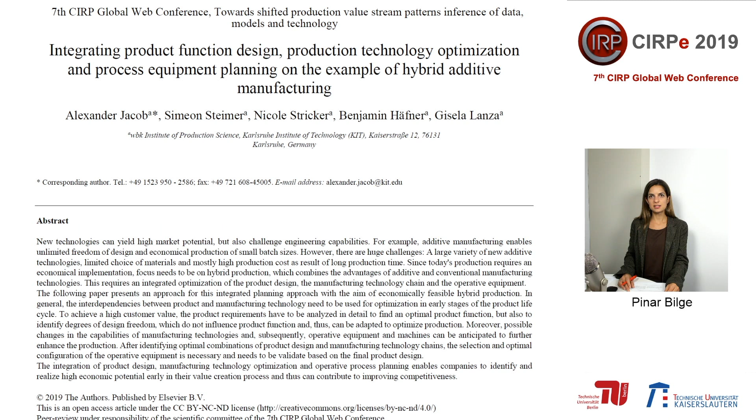Welcome to my presentation within the CIRPe2019 conference. Today I will talk about integrating product function design, production technology optimization, and process equipment planning on the example of hybrid additive manufacturing. To understand the necessity of such an integration, it is important to be aware of the shortening product life cycles and the increasing innovative pressure on companies.

Therefore, companies are required to shorten and accelerate their product development and production planning processes. Within each of the three domains—product function design, technology planning, and machine and equipment selection—I will briefly present the state of the art.

For product function design, it is important to know that nowadays a product design is usually iteratively validated. For example, a computer-aided design is created and then a finite element method or a computational fluid dynamic method is used to validate its functional fulfillment. Based on this degree of fulfillment, usually another adaptation of the product design is manually conducted. Automating this flow between product design and product function validation is only rarely seen. For example, topology optimization nowadays is automated and thereby optimizes product function, for example, lightweight design, automatically.

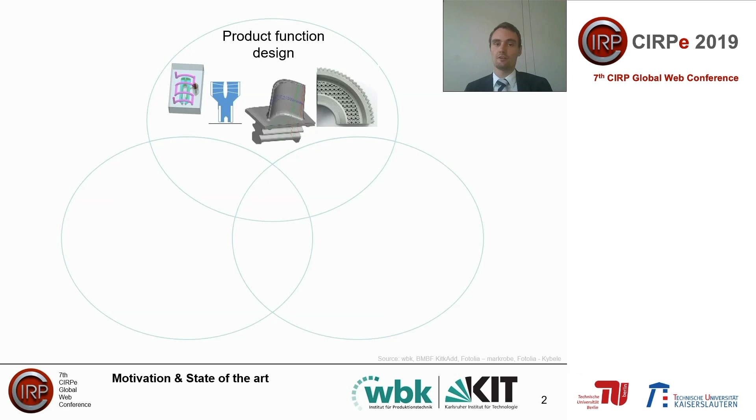In technology planning, the goal is allocating a manufacturing technology for producing a certain product or a certain product feature. To allocate the manufacturing technology to a product feature, usually certain product requirements are taken into account and are modeled. Recent approaches in technology planning focus on stochastic modeling of uncertainty about technological capacities or abilities of manufacturing technologies, or focus on special areas such as producing critical parts in airplanes, for example.

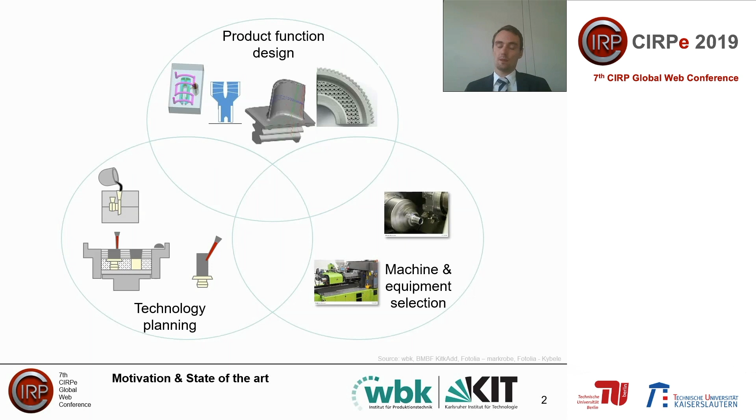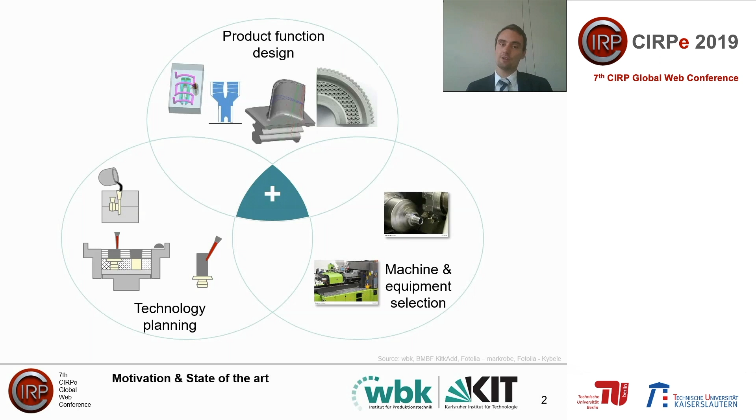The integration of technology planning is usually seen within machine and equipment selection, so that based on technology planning decisions, there are approaches which are able to select a certain machine based on product requirements and manufacturing technology requirements. Nonetheless, there are no approaches able to automatically integrate product function design, technology planning, and machine and equipment selection. Therefore, I will showcase an approach able to orchestrate this integration and also to digitize its application.

The presented approach is shown here. First, we will discuss how a product model can be designed, how the manufacturing technology model needs to be designed, and how such a product model can be used to calculate and optimize a certain product function. Based on this information about the product function, adaptations of the product model on the left side or the manufacturing technology model are possible and can be revalidated again based on the product function optimization.

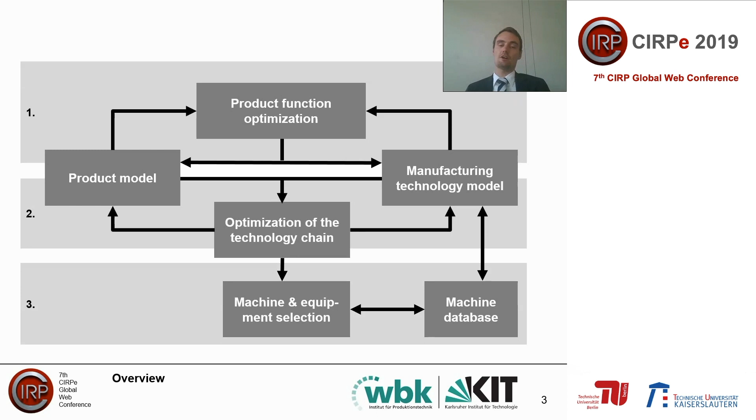Secondly, from a production standpoint, the optimization of the technology chain can be discussed. Therefore, the before-mentioned product model is necessary to allocate a certain manufacturing technology, in form of its model, to produce this product or this product subset in form of a feature. Last, the machine and equipment selection is also integrated, based on the final product design and the final optimal technology chain.

Regarding the technology model, as presented in earlier work, an object-oriented design approach is highly useful. For example, a technology can be modeled focusing on topics such as the producible materials, the possible dimensions of its build volume, and also the possible tolerances which can be accomplished. Such parameters are usually deduced from a set of machines which represent a certain technology.

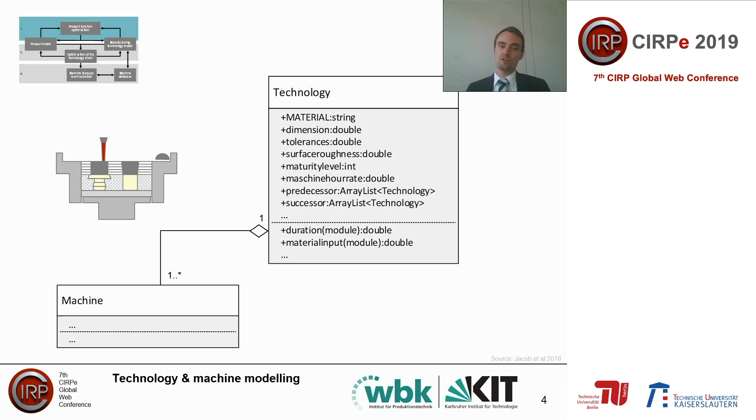On the other hand, the product model can also be modeled based on an object-oriented approach. The same parameters, for example, the product dimension and the product material, are modeled here again and can be, as we will see, used to compare them to machines and also manufacturing technologies.

Regarding the product function optimization, as mentioned earlier, it is necessary to implement it here. In this approach, this is conducted by designing a certain method which has certain product input parameters, for example, the CAD geometry of a product, and then returns a fulfillment value.

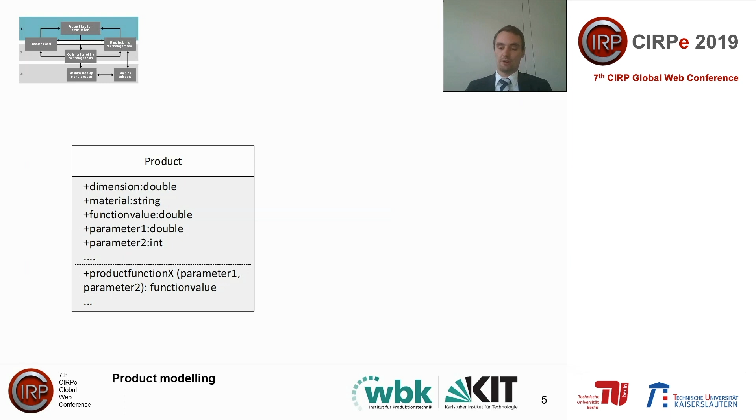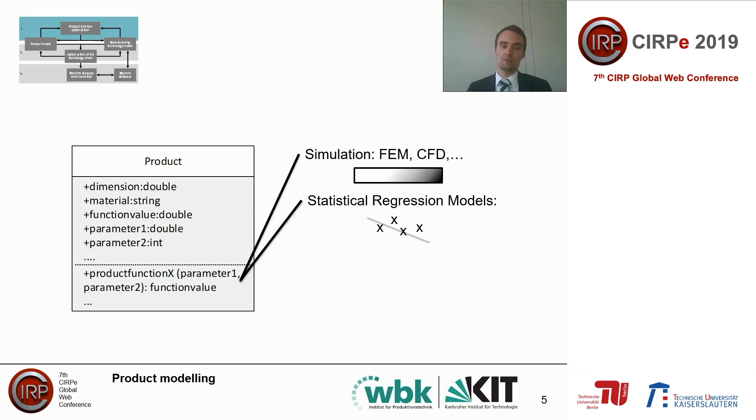The calculation of this function and fulfillment value can be done in a case-specific way. For example, it is possible to implement simulation results from FEM and CFD models as soon as you aggregate them. It is also possible to use statistical regression models if there is no simulation available, or if there is high uncertainty about using a simulation to deduce a good result. And nowadays, especially for more common product functions, ML-based approaches can be applied because, based on a big data volume and a black box approach, quite precise function calculations might be possible, as we see in certain fields.

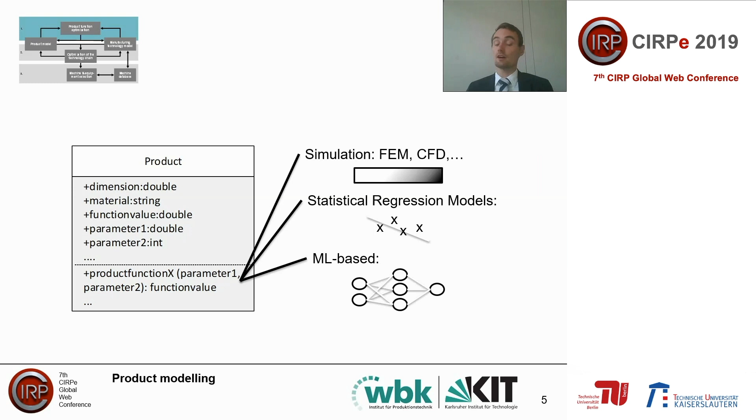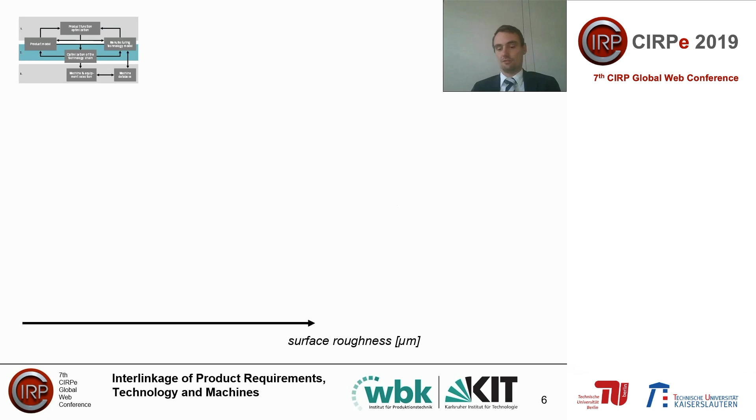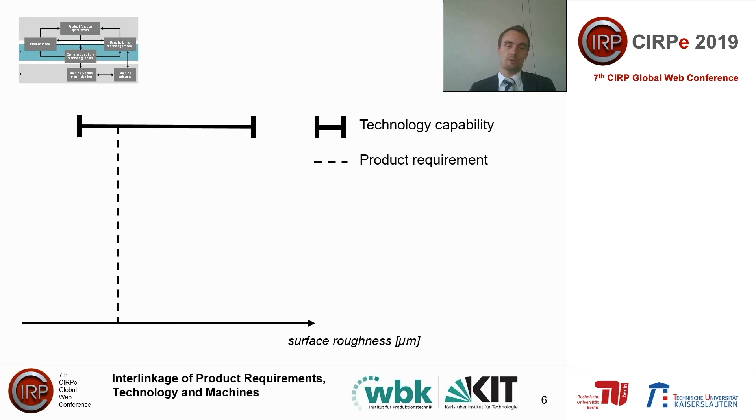Following this, the interlinkage of the product requirements, the technology, and the respective machines is presented. In this example, I will highlight it based on the surface roughness, measured in micrometers. A technology has a certain array of surface roughness which it can produce. The product requirement might be a specific minimal value which needs to be fulfilled. Certain machines also add up to the technology capability, but can be allocated or separated to identify which exact machine is able to produce or fulfill a certain product requirement. In this case, machine 1 would be the machine selected to fulfill the product requirement, surface roughness.

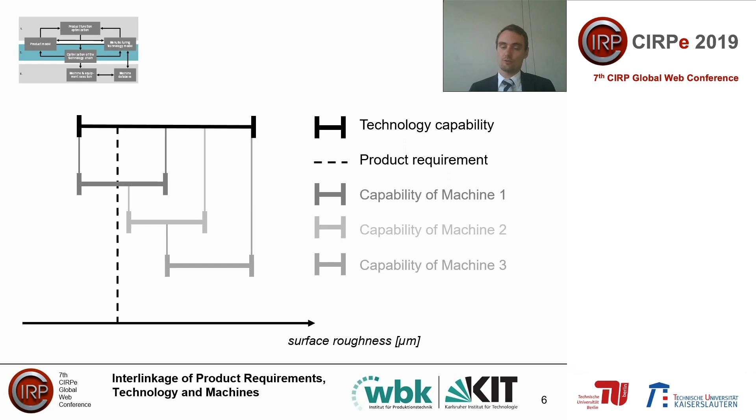Following this, the optimization of the technology chain is presented. This begins by having the before-mentioned product model and even more information, for example, the necessary parameters, the modularization of this product model, and the dependencies between the production order of certain product features. On the other hand, we have the production technology model. We also have the same parameters, but different values here, and uncertainties about their technological capacities. Also, we have dependencies between certain manufacturing technologies and the order in which they need to be used to produce a certain product.

In the second step, the generation and evaluation of the technology chains is conducted. It is necessary to identify possible technologies per product feature or module, then to interlink all technologies used to create the whole product. By doing this, we create technology chains which cover all product modules and are able to produce a whole product. In the last step within this phase, a multi-criteria assessment of the technology chain is conducted.

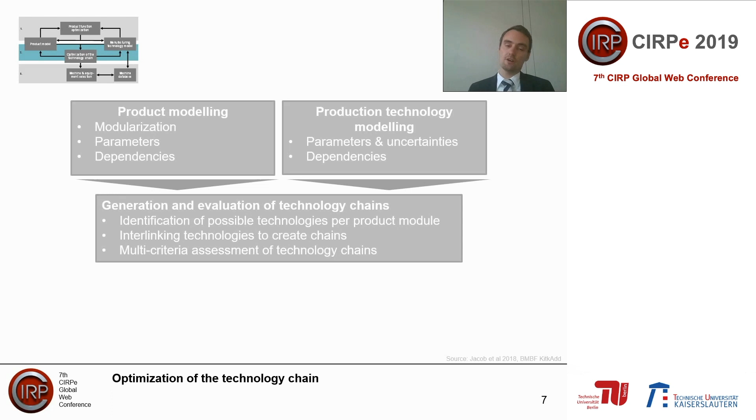After the generation and evaluation of the technology chains, the optimization of the product and the production technology model is conducted. First, stop criteria need to be defined, for example by using the same multi-criteria used for assessing independent technology chains. Then, parameter gaps within the allocation of a manufacturing technology to a certain product model can be calculated and eventually used to recursively and iteratively adapt the product model or the production technology model. More information about this iterative optimization approach is given in my work, Jacob et al. 2018, which is listed in this paper's literature.

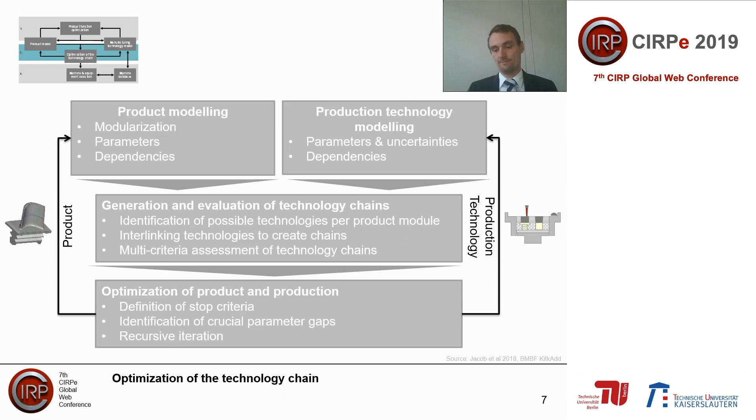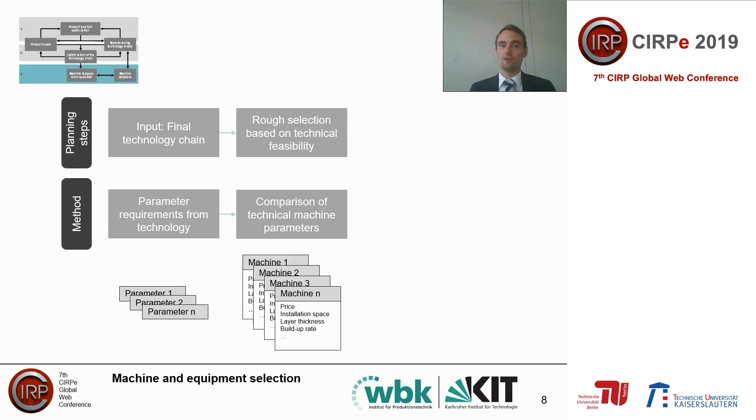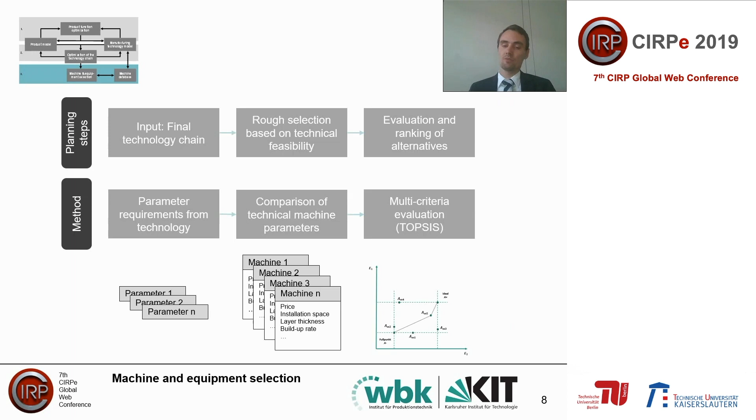Coming to the third step of this approach, I will showcase how to use this interlinkage between product requirements, manufacturing technology parameters, and machines. First, we have the final technology chain and the final product design. Based on the required parameters from technologies, it is possible to deduct and select one of the machines, as shown earlier, which fulfill the product requirements, which are from a certain technology class, and which can now produce the required product and fulfill the product requirements. In the last step, there might be several possible machines which fulfill technological requirements and are from the ideal technology class. For them, again, a multi-criteria evaluation, in this case via TOPSIS, is conducted.

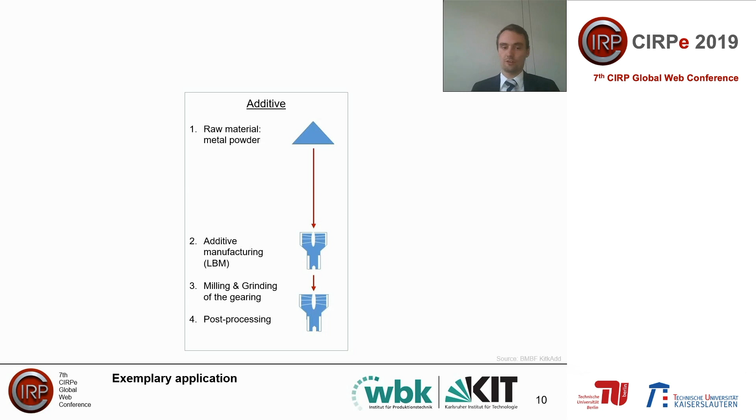For example, one possible technology chain to create the product, as well as the lubrication channels within the upper part of the sun gear, is laser beam melting. This involves melting a raw material, in this case metal powder, via laser beam melting, followed by milling and grinding as post-processing. In this case, we produce the whole product within one additive manufacturing process with only certain post-processing milling and grinding steps.

Another alternative assessed is a hybrid production chain. Here we start with a shaft profile, which is usually cast, then turn and drill some of its technical features. Subsequently, we print via laser beam melting the sun gear head, including the lubrication channels, on top of the shaft. Afterwards, the gearing and spline are milled and ground, and finally finished in several post-process steps.

A third alternative might arise, which exchanges the laser beam melting process with a drilling process. In this case, we have a raw workpiece larger than in the hybrid process chain, which is then turned, drilled, and milled to create the gearing and spline. Afterwards, the lubrication channels can be drilled in the sun gear top. But to fulfill this drilling, the actual sun gear lubrication channel design needs to be adapted.

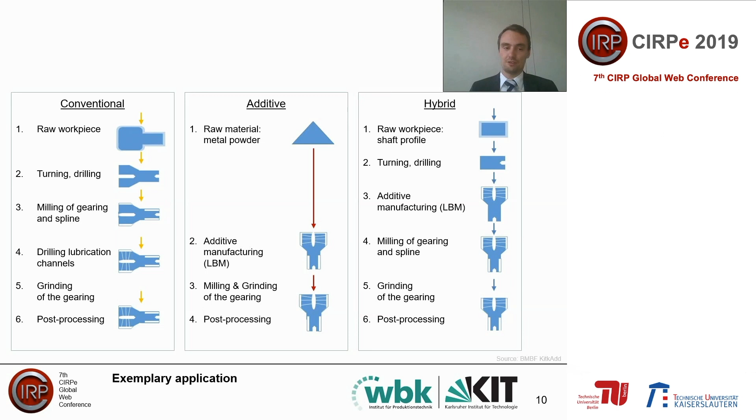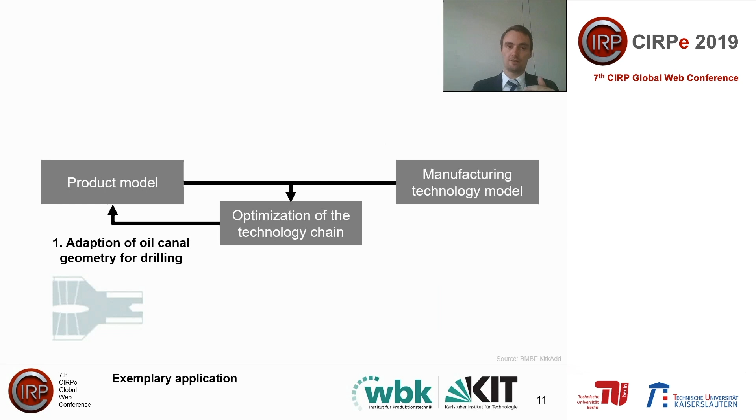This adaptation of the original product design needs to be evaluated. Certain product model parameters regarding the geometry of the lubrication channels are adapted. This adapted product model is then used within the product function optimization and calculation to deduce a new product function value for the lubrication function.

Within the project, we looked at the expression of lubrication in terms of milliliters per second for a turning gear. Based on this product function calculation, it becomes clear that a certain function value threshold for lubrication is not fulfilled, and thereby the new design and technology chain of drilling such lubrication channels cannot be used further.

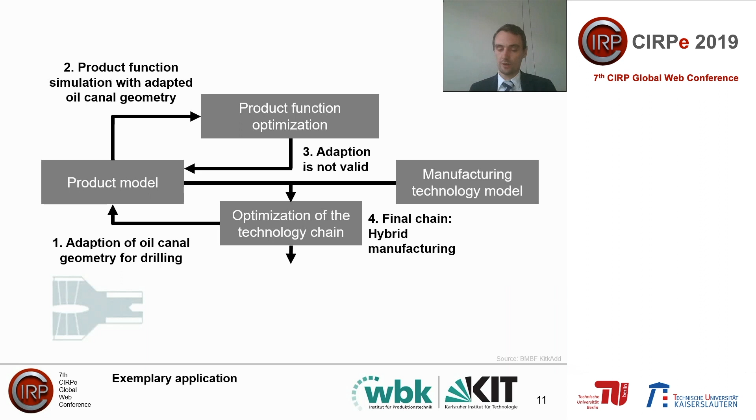This leads us to the next step: we have a final technology chain, which in this case is the most economical one, the hybrid manufacturing chain, and this leads to machine and equipment selection.

Within this approach, one small example is the selection of a certain laser beam melting machine. We looked at three different machines: the SLM 800, the MetalFab 1, and the FormUp 350. The FormUp 350 didn't fulfill the necessary build chamber volume, and by comparing the SLM and the MetalFab 1, we deduced, for this example, that the SLM 800 is more economical.

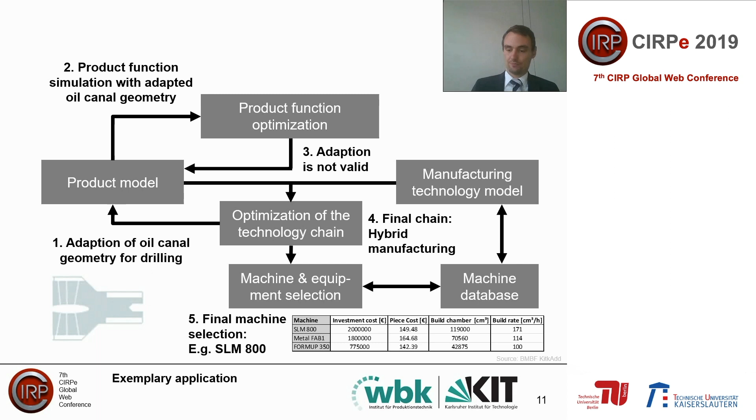For future work, it can be said that the integration of more elaborate simulations, regression models, and also machine learning-based approaches for the product function value calculation needs to be validated, and that more experiments and adaptations need to be conducted to ensure such approaches are not only theoretically feasible but also deliver a real advantage.